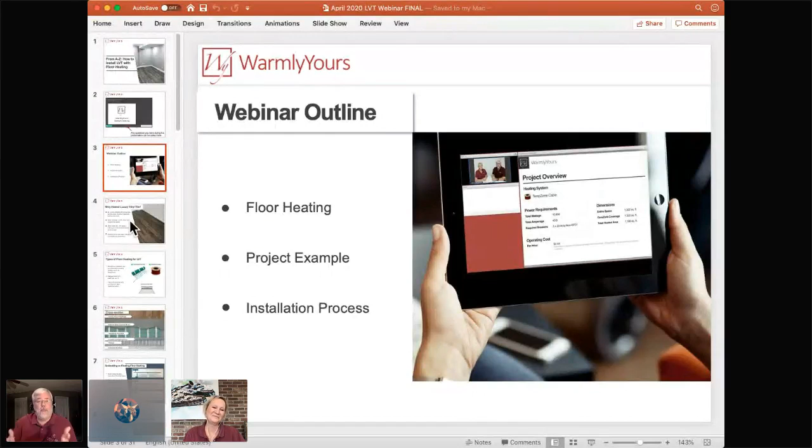All right, let's move on now that we've got the outline. We've actually done this topic before, and the reason we do that is it's very popular. I think this is our most popular webinar. There is a lot of buzz, a lot of interest about luxury vinyl tile, for a variety of reasons. You love this product, Scott. Why do you love it so much? Well, because it is very price friendly. Okay. And it's very easy to install.

And it looks beautiful. I have a luxury vinyl tile installed in one bedroom, and it really does look very similar to this. It almost looks like a wood flooring. So it's got an elevated look with an inexpensive price, definitely durable, great for high traffic areas, great for pets. And does it have any waterproofing? Usually if it's put in together correctly, it's very water resistant. And it feels a little bit warmer than tile does, and a little bit warmer than laminate does. Yeah, so again, a lot of buzz around this type of flooring, luxury vinyl tile. And of course, people are going to be using this in rooms where they may want to combine it with heated floors.

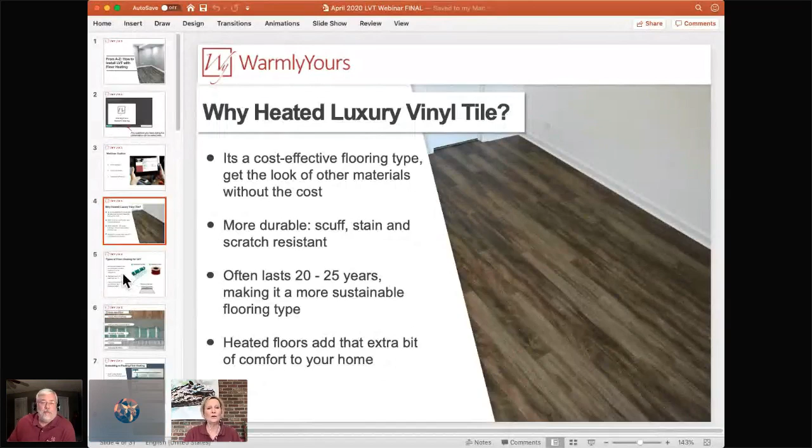All right, so we've talked about luxury vinyl tile. Let's take it to that heated system. So today, there are a variety of ways that you can do floor heating. We're going to be talking about two main product lines. And the reason for that is the floor heating needs to be embedded in the floor. And we'll actually show what that means, but it's a very specific type of install.

Most of you who have done tile work will be very familiar with embedded systems. So we'll be talking about how to do that, very detailed. We're also going to be telling you a little bit about how it heats, the fact that it uses watts per square foot, anywhere from 8 to 15 watts per square foot. And we'll share with you how that's important and when you're going to need that kind of information.

But the key here is we're pairing our TempZone floor heating products, two iterations. On the left, you'll see a roll product. That is a heating cable that is sewn or adhered by tape to a fiberglass mesh. And on the right, you see our TempZone cable product, and that is cable on a spool. So how'd I do with explaining that, Scotty?

Pretty good. What people normally think about when they're heating this type of floor is that they want to use the product that has been historically used with laminate.

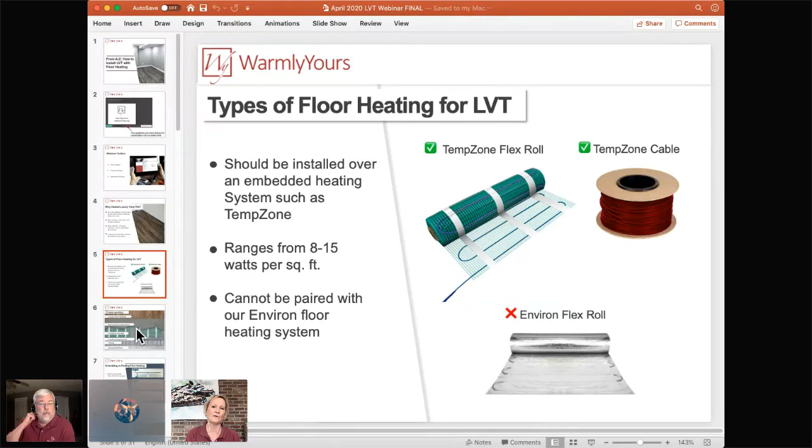But the Environ product is specifically for carpet in the U.S. and for laminate in the U.S. and Canada. So we're going to explain why this specific type of product needs a specific type of installation. All righty. So basically what we're trying to show you here is, and we're the experts, when you're doing your luxury vinyl tile application, you can count on us to walk you through the exact product for your application and to steer you away, as Scott is saying, from the Environ heating roll.

I'm going to take over, Scott, and move on to the big picture. We've talked about the fact that the final flooring surface is luxury vinyl tile, and we know we're going to be installing under that a heating cable, but there is a whole sandwich that has to happen from the subfloor to that final flooring surface. So I'm going to start at the bottom. Actually, I'll start at the top. I'm a woman, I can change my mind.

So at the top there, we have the luxury vinyl tile plank. And that is an embedded system, as we indicated. That means it's going to be embedded in self-leveling cement. Most of you are familiar with that. It basically just means that once you install from the subfloor up, you're going to float in that self-leveling cement over top the floor heating system, and you'll see that next part of the sandwich. Here we're showing you the roll, but that could be the cable as well.

In this particular application, let me introduce another product. The other thing you're going to see in that sandwich is something called CeraZorb. That's an underlayment. And the reason we're using CeraZorb is because it's over a concrete floor. Scott is the champion of this because he takes a lot of tech support calls. Anytime you have a concrete subfloor, in a basement or a sunroom, it's very important that you isolate the floor heating from that concrete subfloor, because the concrete will actually draw the heat out and downward, rather than it radiating up and out.

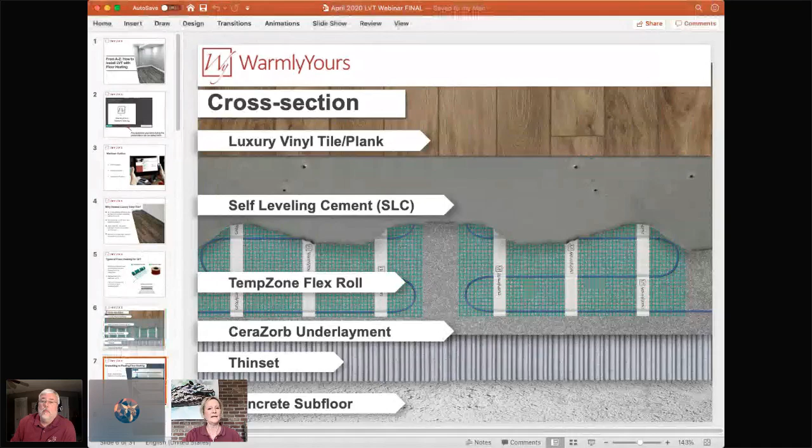I think the next step is making sure everybody understands. For us, the key is understanding that subfloor, that final flooring surface, and from there we can decide what happens in between. So I hope that helps. I hope that answers the question.

All right, embedding versus floating floor heating. So earlier, Scott, you talked about the fact that a lot of people are confused between luxury vinyl tile and laminate. They might assume it's similar in terms of install. They might even assume it's similar in terms of what products you use, but you like to make a distinction between those. Well, the thing about LVT is it's more pliable than laminate 9 times out of 10. And the laminate is more resilient. LVT over time can start bending and conforming to what's under it. And I think that's what this picture shows.

Okay. Let's do a reality check with Olivia. Olivia, can you hear us okay? Yeah, I can hear both of you fine. And we have someone else watching on staff. They said that you're both good too.

Perfect. Okay. So, Scott, talk me through this image that I'm looking at here. Well, usually LVT has much more stringent requirements when it comes to flatness when you put it in. And because laminate is more resilient, it stays straight. Mm-hmm.

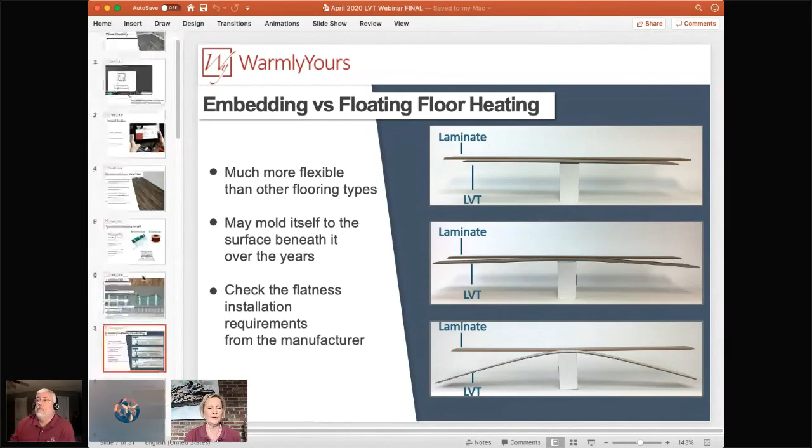Right. So I guess what we're pointing out here is that's why all luxury vinyl tiles must be embedded. They cannot float, correct? Yeah, you'll see people say, I've got SPC, or I've got this type, or I've got that type. If you look at the flatness requirements for installation and the requirement for embedded heat, those are the 2 reasons you go into this installation type that we're showing today. Okay. All right. Excellent. So I think the clear takeaway here is always embedded, never floating, correct?

Correct. All right. Excellent. And then the next thing that people are always asking, and I think we were going to talk about this with the question that we had earlier, is what do you look for when you're purchasing your luxury vinyl tile? And I know for you, Scott, one of the things that you prefer is no or minimal backing. And I believe the reason for that is that you want to make sure the R value is as small as possible. And we usually say 1 or under.

And the reason for that is we really don't want to trap the heat, or have it take longer than it should to warm the room and the objects in the room. We want to get the most efficient heat transfer. And when you have a high R value, that heat transfer can be compromised. Is that a good way of saying that? It won't go through the covering. Yeah. It's like spending a whole bunch of money on heating the subfloor and then putting something over it that traps all the heat, doesn't let it up.

Yeah. So I think to answer the question, is this possible for all luxury vinyl tile flooring? Yes, as long as you contact the manufacturer, make sure that anything that's on the backing, I've seen foam, I've seen rubber backings, make sure that the R value is at or less than 1. And then the other thing that you always want to check is warranty. And make sure that with embedded electric floor heating, the warranty is not voided if you're coupling with electric floor heating.

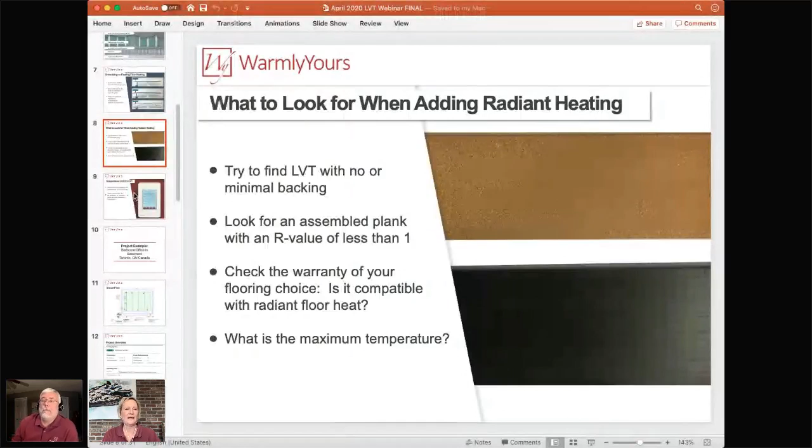Excellent. We really wanted to hone in on that temperature limit that you just talked about, Scott. So the whole reason for this is to show you guys that there are controls that come with the floor heating, and that control allows you to do a lot of things. But one very important thing when it comes to luxury vinyl tile, laminate, and any type of wood flooring, frankly, is that it allows you to default the setting to laminate or to a custom setting so that the floor does not exceed that manufacturer limitation.

And as you can see, the default there is 82 degrees. It says laminate, but it's the same for luxury vinyl tile. And you can even make that a custom degree as well. There are certain woods and laminates that will allow you to go up to 84 degrees. There are some that will want you to be right at 80. So know that number and know that we have a control that will allow you to accommodate it. Anything else you want to share with that, Scott?

Well, this is the only place where the worlds of laminate and LVT come together, and that's in the temperature limitation. And that's why it's so important to get this set correctly. Because if you set it correctly, you don't have to worry about warping. And that's one question that Mary P had. Yeah. Do you have to worry about warping? No, because we're able to control the temperature so tightly.

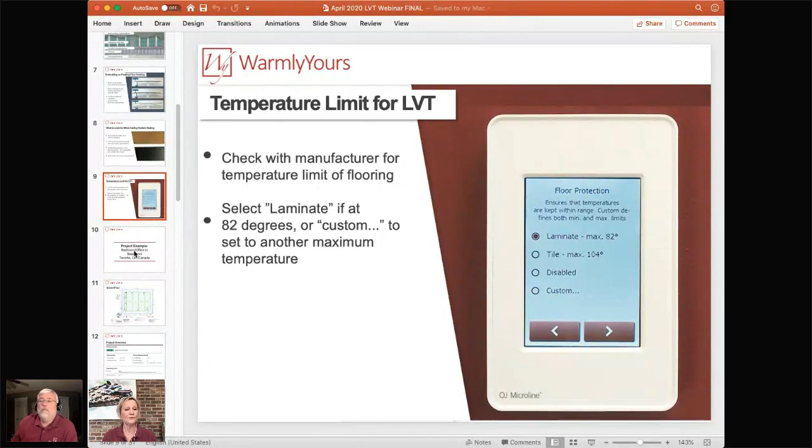Yeah, it refers to the setback that these thermostats offer. So comfort temperatures when you're expected to be on it, and then economy when you're away at work. Okay, so they may limit that. So what would be the question that they would ask the manufacturer specifically? Setback is the word. Does this have a setback restriction? Okay. All right. Cool. Thank you for sharing that, Scott. I didn't even know about that. So good stuff.

So now we get to go into the real world. Yeah, the good stuff, right? We've talked about the control. We've talked about what to look for with your luxury vinyl tile. We've given you a general kind of sandwich overview of what all is included. We've talked about the floor heating. So let's take all of that great knowledge that you just passed along to everyone, Scott, and let's drill it into a real project. This is a basement project. Again, that's why we use the CeraZorb. We wanted to isolate the heating element from that subfloor with CeraZorb.

What's the R factor for the CeraZorb, Scott? I know it's over 1. Is it over 2? 1.5. 1.5. We split it. So a great R factor. Really helps to make the heating system more efficient. So faster warm up time, stays warmer. So that's why that CeraZorb is included in this project. So this is a bedroom office combo in a basement in Toronto, Canada. So it's cold. So when they were redoing the basement, they definitely wanted to put in floor heat, and definitely wanted to get that CeraZorb as well.

Now, when we do projects, the first thing that we like to get from you, and the first thing you should get from your customer, is a drawing of the room. That's key. A lot of things happen from this plan. One, it's used during install. Two, it's used in pre-planning to talk about where exactly you want to heat. The beautiful thing about radiant heating is you put it exactly where you want it. And then it's also a tool to understand what might be some of the things in the room that we want to avoid. So this is the bedroom office combination, Scott. What would you like to point out on this SmartPlan?

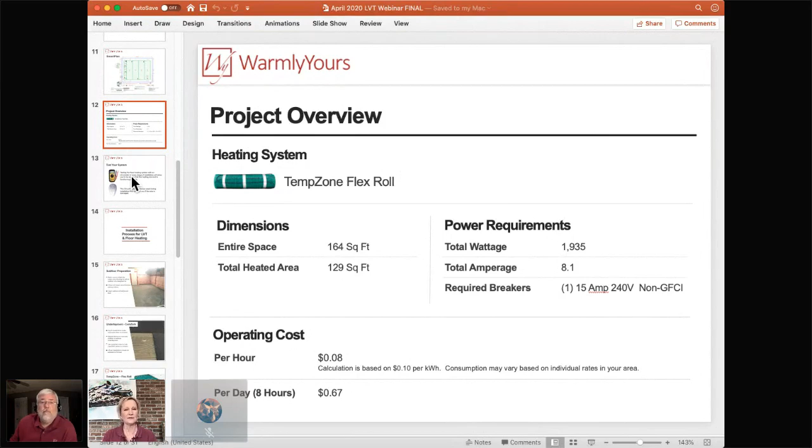And that's another thing, guys, that we can work with you. If you only have 120 available, we could have reduced that coverage. If you go up a slide, Scott, we would just reduce the coverage here and get that down to the 120, and you would be able to put that in 120 volt easily. That would be very easy for us to trim this room down.

All right, moving on. Let's see what we're going to talk about next. My favorite slide. I know. Do you want to go for it?

This is stating how important it is to test your system. The first thing you want to do when you get that box from us is look at it in all its majesty and go, this stuff looks awesome. So this is the part of the project where you've purchased it, it's arrived at your front door, correct? All right. Sorry, just wanted to set the stage. Go for it. So you're going to get that box. You're going to open it up.

The first thing you're going to do is test it, because if your installation date is next week and something's happened to that product, you can get it replaced in time. So it's very important to test it when you get it. And the only way to test it properly is with a digital ohmmeter. You don't want one of those old-fashioned analog meters with the needles that go back and forth. You want to make sure that you use this digital ohmmeter. And Scott, there are probably people that don't even know what analog means out there. So I think we're fairly safe.

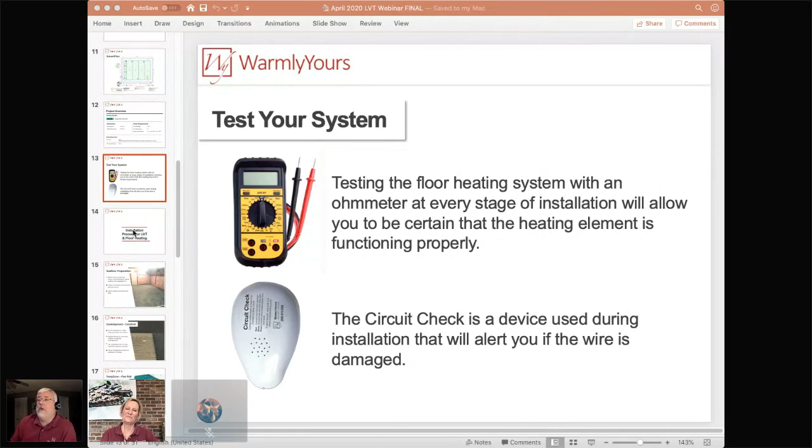Well, let's move on. We've tested the systems, everything's go, and now we're going to walk through the installation process. Everything starts with cleanliness, right? Yes. Let's move on to the next slide. Okay, we're done. Goodbye, everybody.

So everything starts with that subfloor, and this is the actual subfloor for this project. This is concrete, Scott, but as we're talking through this, we should discuss a wood subfloor as well. Cleanliness is key. So how do we make sure it's clean?

Well, you follow the manufacturer's recommendation of the self-leveling. Yep. They're going to tell you how to clear any grease or dirt or oils. Dust. Yes. We know if you've been on a construction scene like this, dust is everywhere. Everywhere, absolutely. Dust coating these surfaces is going to keep the surfaces from bonding together. So it's very important that they get cleaned. Yeah. So you probably want to sweep, vacuum, mop, degrease, and make sure that it's as clean as possible. So clean you could even eat on it.

So that's key. Now, if this were a wood subfloor, what else would we be looking for, Scott? Well, it's very important to level the floor first, because self-leveling is going to find level. Okay. And if you have a floor that's shaped like a bowl, especially in older homes, second floor bathrooms that are 100 or 200 years old, those floors are going to sag in the middle.

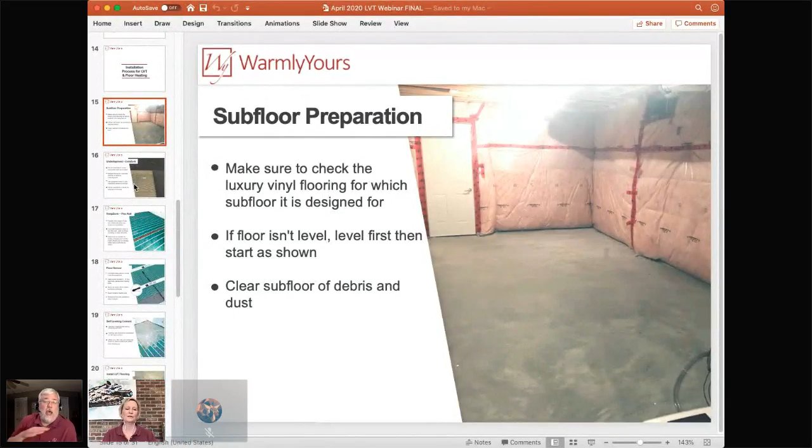Clean, level. Anything else we should check for? When we heated your basement, there were some cracks or some stuff left over from construction. Right. Huge crack right down the center. We had to take a grinder. Yep, and we had to grind those edges down, because of the flatness requirements, but we want to make sure that the cable doesn't go over a ridge when you're installing it. That's a good tip. Not everybody has those types of cracks, but I definitely had those cracks. Did we do self-leveling in my basement as well? We did not, but we had to prepare it to get it flat. So they may run into that. Gotcha. All right. So that's the subfloor.

The next thing for this particular project, we're putting down CeraZorb. It's on concrete. We've talked enough, I think, about why we're doing that. But the key is, how do you do it? So Scott, this is the first bit of that sandwich. How do you get the CeraZorb adhered to that concrete subfloor? The best way is with latex modified thinset, with a 1/8 inch V-notch trowel, and you put that down. You set the CeraZorb out in brick pattern. And then once you get it set, you pull it up, make sure you have adhesion, put it back down, and then put a roller over it, 30 to 50 pound roller. That's going to push it down into the thinset.

I've seen this brick pattern technique used with other types of insulation or underlayments. I've seen it with CeraZorb. I've seen it with cork. Why are you using a brick pattern? Because then you don't introduce one long seam in the room that you might get a crack in. That's more important with tile because you don't want it to translate into the tile or into the grout line. With this type of flooring, you really don't have to worry about it that much. It's just a good habit to get into.

Okay. So you're using thinset, latex modified. Does it have to be modified? Yes. Okay. So latex modified, and you're adhering it. Lift it up, make sure you get a good adhesion. What happens if you don't? You may hear hollow spots. That's especially prevalent with tile. But anytime you have an air gap in there, you may get some play up and down in the entire system, and you may see some weakness in that spot. I see. All right, let's do a pause.

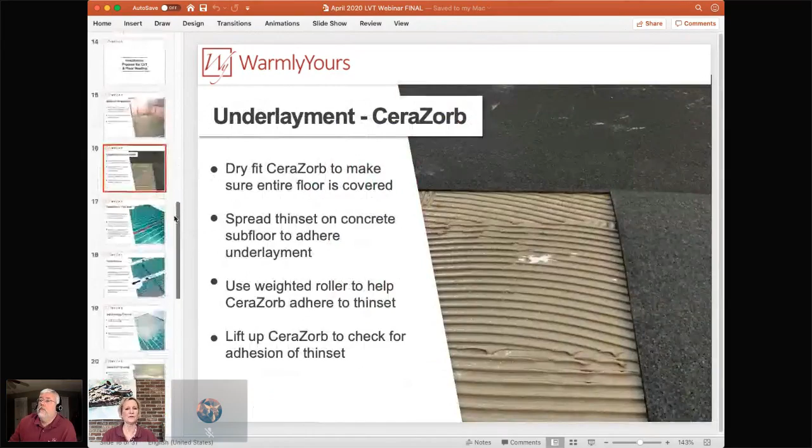I like that. All right, so we've put the CeraZorb down. Over that is the heating element, the next layer in the sandwich. This is a roll, could be a cable. Again, it could be a custom mat. We'd walk you through that. And you're following the floor plan. If you look at this big picture, Scott, you brought this up as we were rehearsing for this. You can actually see the floor plan was adhered to. So show that, right?

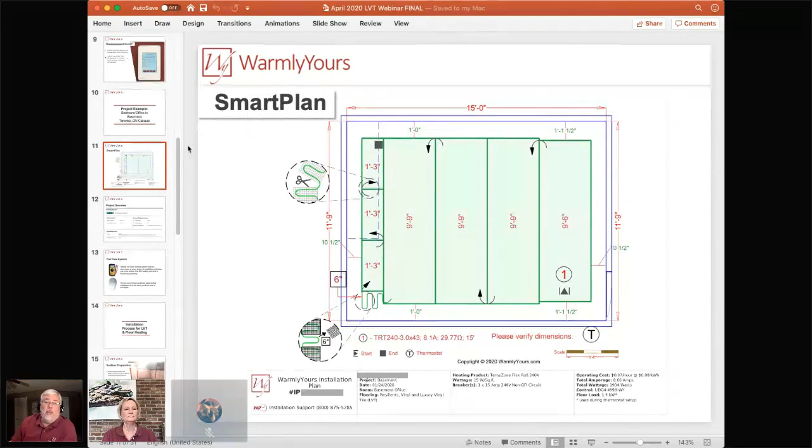Yeah, if you take a look right here, you can see where the wire's going in a different direction. Yeah, and go back there. Right there it is. That wire is going in a different direction. So we can tell they followed the plan. So let's go back. As they're using the SmartPlan to get the coverage in that room, they could be tacking it down from time to time. Explain why that's important, Scott.

It's very, very, very important. I said very 3 times. You did. Is that the echo there? It's really 9 times in my headphones.

So what you need to do is get this in place. The proper way of putting this product in is to not adhere it as you cut it and turn it, because you want to do your cuts and turns to make sure it fits first. Because if you're making all your connections and turns and you find out at the end you either have too much or too little, it's much easier to fill that space or to take coverage from that space if the rest of it isn't attached to the floor. Yeah, and I can't stress that enough.

That does happen on occasion. Dimensions change. For example, the latest plan may not take the new dimensions into consideration. We can walk you through how to make adjustments in the field to make that custom roll work for you. The most important thing is some people think, okay, I have too much, I'll just cut it off. And that's a problem, right, Scott? I see you shaking your head. Very big problem. So talk about why that's a problem.

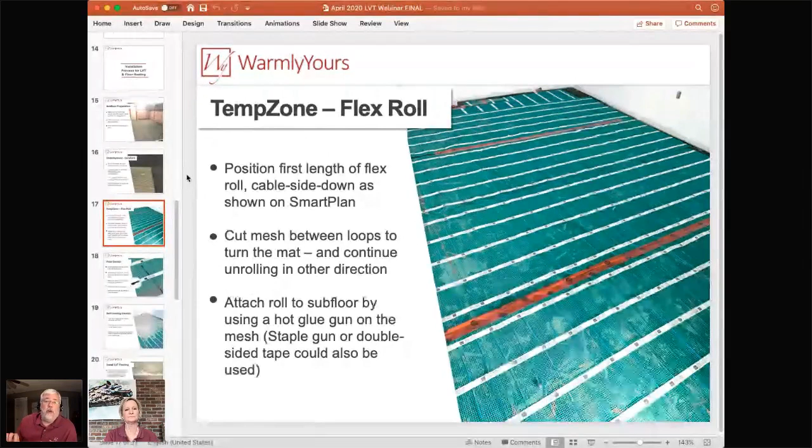Yes, it's also very important, once you have these measurements down and the product is where you want it, to make sure that the wire is face down, the mesh facing up. Because we're going to be attaching the mesh to the subfloor. That's going to keep the wire from floating.

And there are times when you do have to flip the heating element, so the cable may be side up. That's fine. It's just less protection. So if that does happen as part of the design, in some cases we can't get around it. We try not to. But if that does happen, or you have to make adjustments on the fly and you have to flip the cable up, fine.

Just make sure you protect that heating element. Make sure you protect that cable. Did I say that well enough, Scott? Yes. The one more point I had to make is that this product will float. If you're not very, very careful about attaching it to the subfloor, the product is all going to want to float to the top of the self-leveling. The last thing you want it to do is to float. So you can use tape sporadically, hot glue I've seen done to kind of tack it down in places, correct? Yes, everywhere. Because it will float.

Okay. Now, it could be different on concrete versus a wood subfloor. A wood subfloor, it's easy to use a staple gun. Never staple over the heating elements, only the mesh. But for concrete, I assume you're always going to be taping or gluing. Is that accurate, Scott? Right. Gluing is the best.

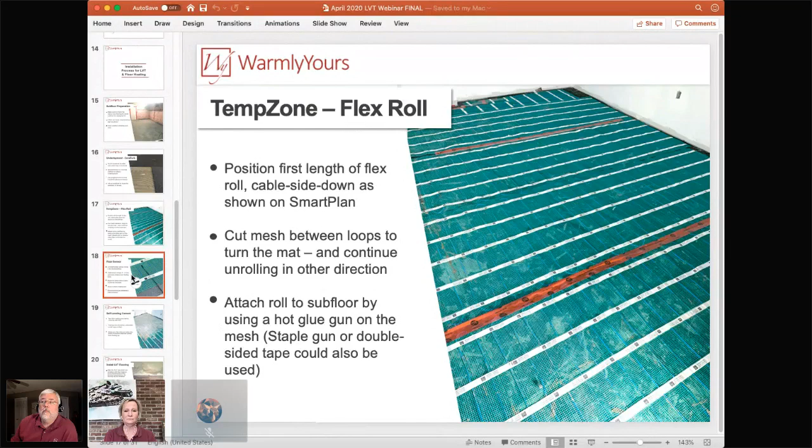All right, and then the final element. Talk about it. This is key, Scott. This is the good stuff. This is what separates electric floor heat from hot water, hydronic: the sensor being in the same level of the floor, so we know what the temperature is, and we can control it very finitely. Exactly. One thing a lot of people like to do is they say, I want to run this out into the middle of the room. Let's get the sensor out there. You don't need to do that. The sensor needs to go right over by the thermostat, about 8 inches into the mesh, so it doesn't go over one of the heating wires.

Yeah, and that sensor is connected to the actual thermostat along with the return power leads. And we're going to show you a wiring diagram for that later. But that's the cable, the sensor wire, if you will, that gets attached to the back of the thermostat. That's a low voltage sensor. It's not line voltage. So usually line and low voltage are kept separate, and we show your electrician exactly how to do that, and most electricians are very familiar with that. So key things to remember is that sensor must go on the floor if it's a luxury vinyl tile install. Why is that? Because if you don't have the sensor, you can't control how hot that flooring gets. So that's key. Second thing is like Scott says, it doesn't have to go across the entire floor.

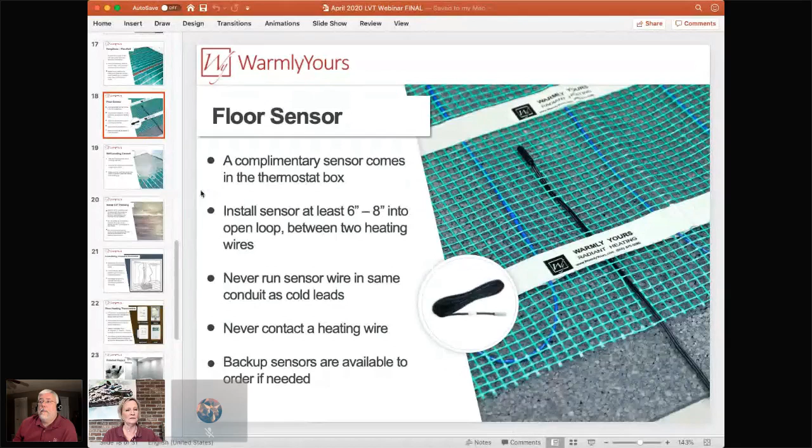Yep. And there are backup sensors available. A lot of people like to put in a second sensor, just in case. You don't attach them both at the same time. It's there just in case something happens to the original. I can tell you these have an extremely low failure rate, but if you want to be conservative in your approach, put in a second sensor. We can supply that for you.

All right, and then the next step is the sensor's in. We now can cover it with the adhesive. What do you recommend when people are using self-leveling cement and they're doing the pour over the heating element? Well, the last thing you want to do is cover this product with self-leveling without knowing for sure that it's good. So that's where you're going to test it before you put the stuff over it.

The final test. What we've shown up to this point is the mesh being installed. Now that it's installed, the sensor's installed, we test them both with a meter. If they both test good, we put the circuit check back on the heating system. Okay. And then we start covering it with self-leveling. So even when you're pouring the self-leveling cement, that circuit check is attached.

Yes. One thing we forgot to mention up to this point is before you put the heating product down, you want to put the primer down onto the CeraZorb using the primer that the self-leveling company suggests. You put it down then, because if you cover the CeraZorb with our product and you go to put the primer over it, it may not get all the way through. So that's one thing that we didn't think about until right now, and I'm glad I brought it up, is that you want to put that on before you put the heating system over it.

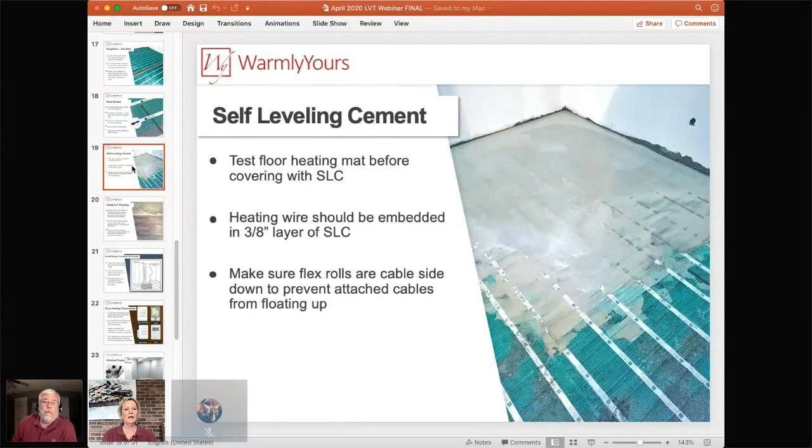Yeah. All right, so that's self-leveling cement, the adhesive. You've got then a nice, ideally flat, smooth surface. You're ready to install the luxury vinyl tile flooring, right? All systems go. Right. Do we still have the circuit check on now that we're installing the flooring? I wouldn't have to, no, because it's already covered. It's embedded, right? Done. It's very safe now. It's in 3/8 inch of self-leveling, so it's safe.

Looks like we might have a question that just came in. Yes, the question is, can you walk directly on the matting to pour the self-leveling, or should you lay plywood to protect the mats? And you can walk over this cable without any problem. Yeah. You just don't want to walk on the splices, which is the black lump at the beginning and the black lump at the end of that heating product. Yeah, you can walk.

Yeah, one thing I'd like to talk about on this particular... Go ahead. I'm sorry. No, and you're going to be monitoring the system as you go. So if you walk on it and, I don't know, there's a nail in your, I don't know what could cause it to penetrate the heating element, but let's say it does, that circuit check is going to warn you. So that's why it's important to have that on during install.

If you're going to be walking on the mesh, which a lot of people do, you're going to want to wear tennis shoes that day instead of steel toe boots. Yeah. And you want to make sure that you clean the bottom, make sure there's no rocks, stones, because those will get into the wire. So please be careful with that. But that's a great question. It is a good one.

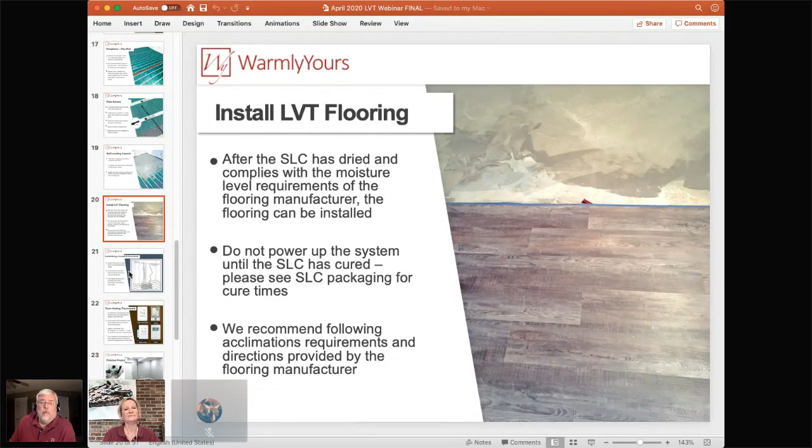You've got the sensor wire, you've got the return power leads. One's line voltage, the other's low voltage. They have to be separated. So that's why you see the two conduits. Not every jurisdiction requires low voltage in conduit. So just check with your local code, or you probably know what your local code is already.

But a lot of times you can just let that low voltage wire hang, and then the line voltage can go in conduit. Now, we had a question about a really large installation that may need power modules and stuff like that. Yeah. If you have a bunch of mats or cables in the floor, if you have 5 or 6 mats and their connections coming to the wall, you're going to have a hard time getting all those wires up the wall to the back of the thermostat.

Absolutely. So that's why I like this drawing so much, because you can picture a junction box down here. Right. Where all of those come in together. Exactly. And then one single wire is sent from this box down to this junction box. Yeah. And that's how you make your connection. And so it's really house wiring from here to there. Yeah. And this is where the cold leads would meet.

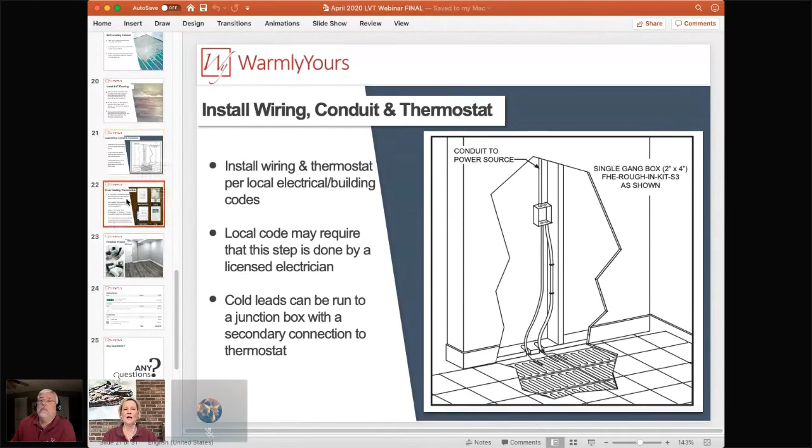And this is one part of the project where we always say, get an electrician. Some jurisdictions require it, others don't, but just play it safe, especially if you're dealing with this particular application. It's 240 volts. That could be a little bit of a shock. Exactly. All right. And then in that box goes the thermostat. We showed you a photo of that earlier, but we wanted to show you again.

There are a variety of controls that we provide. They all have GFCI, as we talked about earlier. They all work with a floor sensor. They do have different functions. We have everything from something that's simple where you just set it and forget it, out to Wi-Fi, touch screens. So depending on you and what you like in terms of features, we can accommodate all of that. Is there one particular control that you like to use for luxury vinyl tile, or are all of these fine, Scott? All of these are great.

I can't stress enough that people should use the touchscreen units. They may think, oh, I'll save a little bit of money, like maybe I'll choose the nHance and save $30. Believe me, the touchscreen units are so much easier to program because they're simple. You press what you want to happen instead of going up and down, okay, up, down, okay, like the nHance. Right. If that's something that you're looking for, easy to program, that's something you want to do with the touch. And you can get the Wi-Fi version or the non-Wi-Fi version, but they're both great, easy to use products.

Now, if you just want a temperature, like if your LVT manufacturer says you need to set it for one temperature and then leave it there forever until you ramp it down at the end of the season, then that's where you choose the nTrust. The nTrust is great because you set it and forget it. So at the beginning of the heating season, I just lost my...

But I think what you were talking about is the fact that you can just set it and forget it. You put it at that temperature mark that the manufacturer recommends, 82 degrees, and you don't touch it again. You might turn it off at the end of the season, turn it back on at the beginning of the season, but it really is set it and forget it. So that's a great choice if you're never going to play with temperature. Yeah, exactly.

And if you are thinking about doing a wood floor, just throwing that out there, this is usually the best control, because that's what most wood flooring recommends. No setback temperatures, a constant temperature that remains the same. This is your unit for that. Nice.

So I think that's A to Z. I mean, we started out with the luxury vinyl tile. We went into the floor heating. We talked about the planning process. We talked about the install process, the wiring it up with the thermostat and the sensor. That's the whole thing, A to Z.

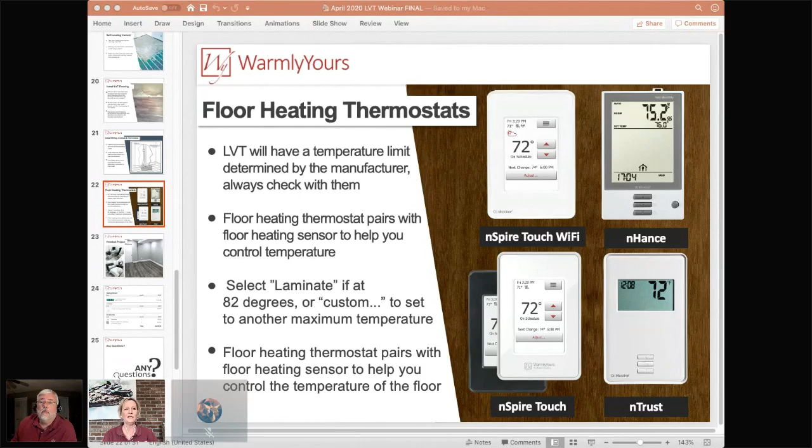The last two things that we want to do is, one, we want to do a final reveal. And then after that, we're going to talk about how much does this thing really cost. So you're going to see the actual product with the square footage and actual cost as well.

So there's the final reveal. It turned out beautifully. Luxury vinyl tile, bedroom with a built-in office. So beautiful, as you can see. Anybody would love to have a basement that beautiful.

And then affordable. If we take a look at the next slide, we like to leave you with this, because another misconception is that, oh my goodness, this is going to be terribly expensive. When you look at the overall project, adding electric floor heating is minimal. Here, the bottom line for this product, and by the way, this included the CeraZorb as well, which in some cases, some climates, you would not need. But the total cost is a little over $2,000. So very affordable, very much needed in the basement, which tend to be cold and damp.

What else would you like to add there, Scott? Well, that's the most important thing we talk about in some of our other webinars. If this is in a basement, usually the air vents are overhead and it's blowing hot air down about 2/3 of the way. And then as it cools off, it goes right back up to the ceiling. This actually gives you, when you get out of bed in the morning and you put your feet down, warm feet as soon as they hit the floor.

A lot of people that I speak to on the phone, if they had a house like this and they move to a new place, the first thing they do after they get moved in is they call us. Yeah, because they want that back. If their new house doesn't have it, they go, I can't live without this stuff. I wake up and my feet are freezing. Right. So perfect for a basement with that warm floor, the CeraZorb, all-in cost, $2,200.

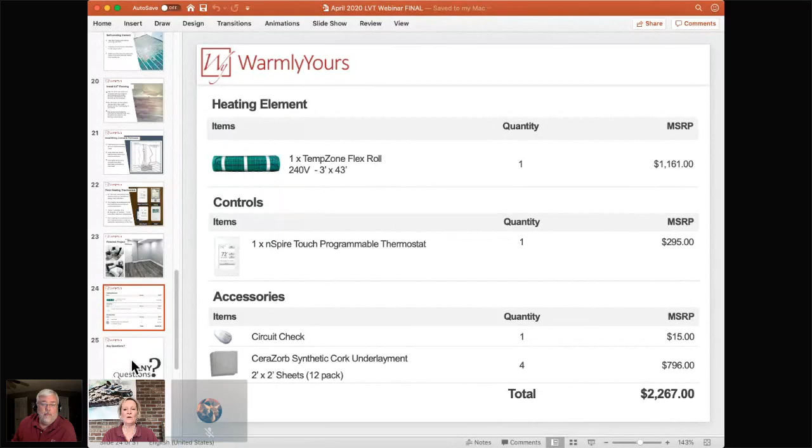I think we have a question here on Crowdcast. So let's answer that question, Scott. You want to shout it out? Yeah, I was just about ready to do that. I was waiting for this slide. So let's go ahead and open this up. How many square feet can 120 volt and 240 volt cover per breaker?

That's great. The thermostats can handle up to 15 amps. So at 15 watts per square foot, which is the product that we used for this project, you can do about 120 square feet of that with one control. That will be right at 15 amps, and you will need a 20 amp circuit breaker for that. At 120 volt. As your amp requirements drop, you may be able to use a 15 amp breaker, but remember, you can only use 80% of that rating. So if you have a 20 amp breaker, you can really only be switching 16. So you need to keep that in mind.

So 240 volt can cover about 240 square feet on that same 20 amp breaker. Right. With a 15 amp control. Exactly. And that's a great question. We do size the breakers for you. We do walk you through that process, but that is a good general tip. So thanks for asking. Great question, Nathan.

Olivia, anything on Facebook? No new questions yet. All right.